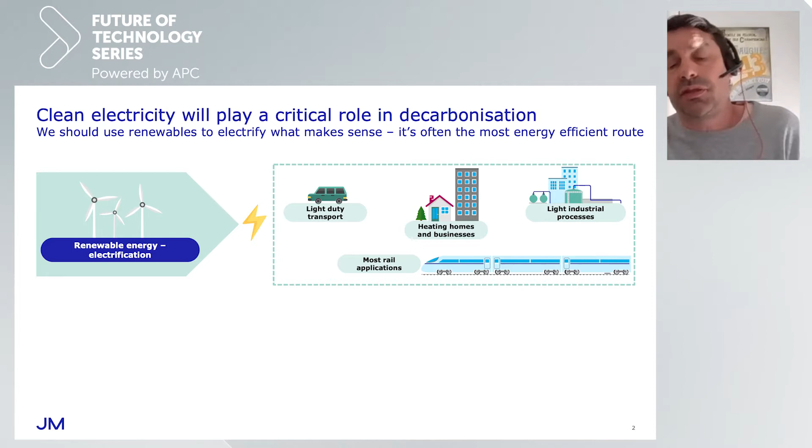We've got to remember we're moving from a global energy system that today has about 80% of energy coming from molecules—whether that's fossil fuels as coal, oil and gas—versus 20% from electricity. So the growth in our electricity system is going to have to be massive. Where we see hydrogen—and we'll come into the different routes of getting to hydrogen—is in energy intensive industrial uses. These are primarily things like cement and steel manufacture, but also a lot of high temperature processes used in industry, which will really struggle in the near to medium term to shift to electrification.

Heavy duty transportation, marine, and some rail applications, particularly branch line type applications, we also see as really critical areas, these hard to abate sectors where hydrogen will play a key role. Also, we certainly see examples coming through globally of where larger and longer range light duty transport will also benefit greatly from a shift to hydrogen.

Aviation's on there. I will have to wait and see whether we'll ever be flying a jumbo powered by hydrogen, but there are many other applications within aviation where hydrogen will certainly be a key enabler to decarbonising that sector. And equally, we're going to start seeing areas where we're going to get crossover between renewables, hydrogen, and then potentially onto things like sustainable aviation fuels.

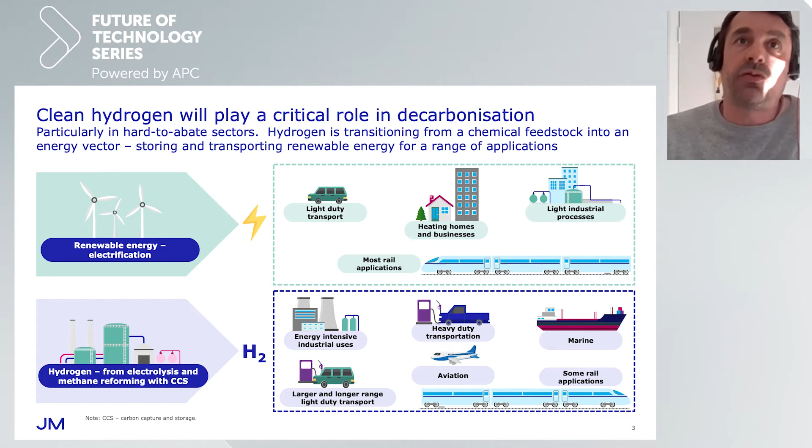That's shown a little bit here in this flow diagram, where there is the potential that we can move to a system where we're using renewables and water to generate hydrogen through electrolyzers. We can pull CO2 either from waste sources, from industry, or from, for example, the use of biomass to create power. We can then upgrade that to hydrocarbons by a variety of different routes. Many of these are technologies that Johnson Matthey is actively engaged in, either by providing components or full technology processes, where we can then get to fuels, chemicals, fertilizers, all to drive a more sustainable and greener future.

Now, this is a technology-driven map at the moment. We know how to do these blocks. What we don't have in place is the market conditions to make many of these things happen.

Particularly when we're looking at things like the ammonia and methanol market. These are global commodity traded chemicals. We will need a global market or a differentiated market to drive low carbon equivalents or low carbon options. And we will have to be looking at how we deal with that global trade.

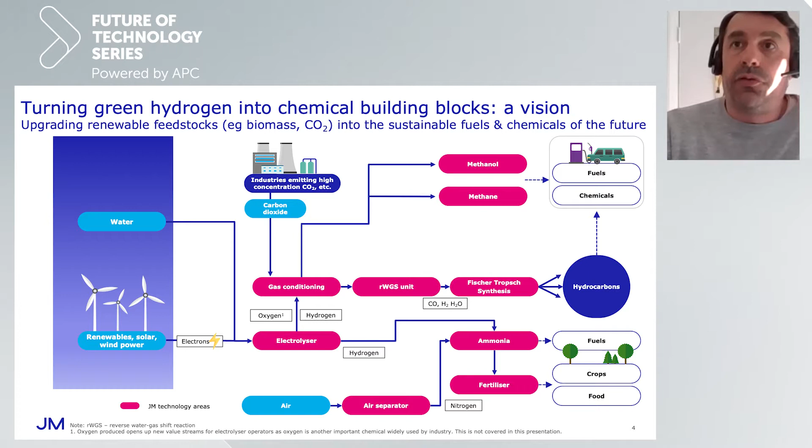Back to hydrogen. You're probably all aware of the rainbow that comes with hydrogen, and I'm only showing 4 of the different colors that are often mentioned. Brown hydrogen coming from coal, very high emissions, but you can see is a very low cost per kilogram of hydrogen, and that's the competition we're in.

Most hydrogen today is produced by steam reforming of natural gas, or grey hydrogen. This is a segment where Johnson Matthey supplies catalysts globally. Again, a high emissions per ton of hydrogen, but again, a very competitively priced product. And this is what we're having to compete with.

When we move to blue hydrogen, where we again use natural gas, but now use carbon capture and storage, we can dramatically cut those emissions. Johnson Matthey developed a technology called LCH, where a key part of that is that we use differentiated technology to drive down the overall emissions by making it as easy as possible to capture the CO2 from the process as cost effectively as possible. And we can achieve over 95% CO2 capture, in some cases up to 98%. This again is a relatively low cost process, but is more expensive than today's grey hydrogen.

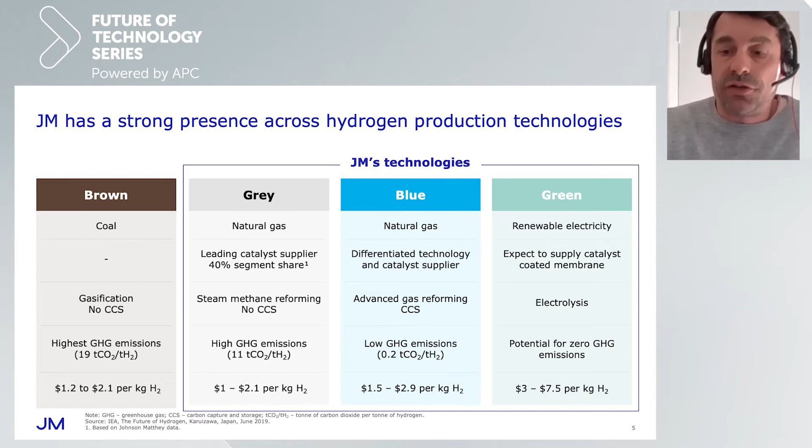What could hydrogen do in the future? These are numbers that we've pulled from some work from the Hydrogen Council and IEA.

Let's focus less on the split between blue and green hydrogen, we can argue about that till the cows come home. The key thing is we're seeing dramatic growth in hydrogen between today and 2050, shown here in terawatt hours. Grey hydrogen today still makes up a substantial amount, and the emissions from that are equivalent to the total emissions from the UK and Indonesia combined. So not insubstantial, and we will see that phase out over the decades as current assets come to end of life, and we'll see the growth of blue and green hydrogen. You can see we're looking at minimum a 10-fold increase in the volumes of hydrogen required.

Grey hydrogen is going to decline due to future carbon prices. We think blue hydrogen will be adopted in areas with good geology to allow carbon storage to happen cost effectively, but also areas with strong infrastructure for natural gas distribution. The UK is one example, but equally the US and Canada, which have large access to low-cost shale gas.

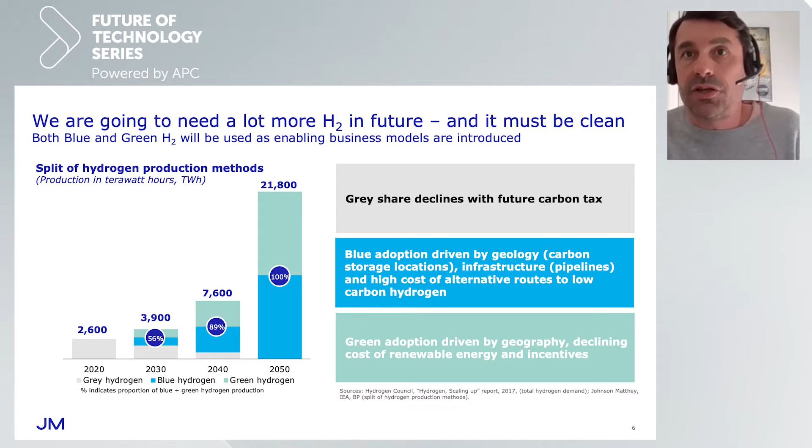On costs - we mentioned this briefly before. What we see is that blue hydrogen will be one of the more cost-effective routes for a number of years, particularly in locations like the UK. But we do anticipate a large cost down in green hydrogen, and in some areas it will become more cost-effective to produce green hydrogen over time than blue hydrogen, with grey hydrogen becoming ever more expensive as carbon prices rise.

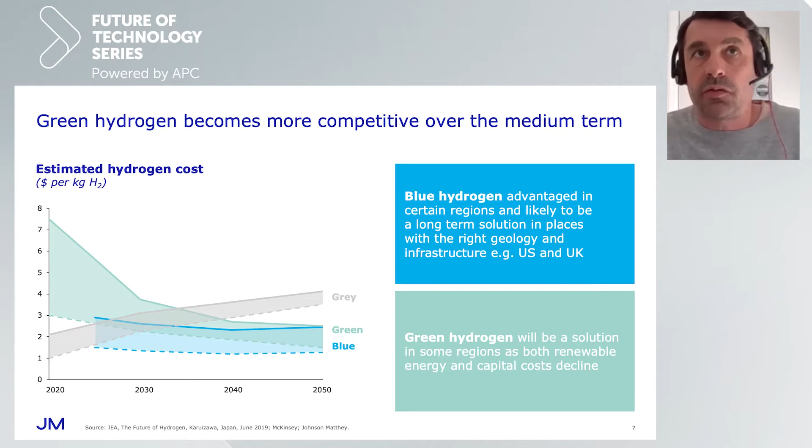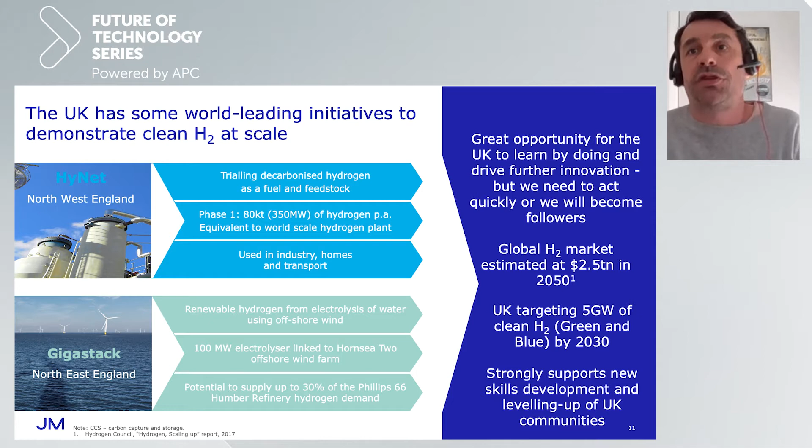So in summary, the UK does have an amazing opportunity to be a world leader. Really, for us to drive a legacy into the UK, particularly into the supply chain - and that's all elements, services, engineering, manufacturing - we need to be one of the first and not a follower. If we're a follower, we'll end up importing key elements of the supply chain. This is one of those timings where we've done a lot of good work, and we've made some really impressive starts, but we've got to follow that through and deploy these projects at scale. The really critical next step - hydrogen strategy is part of it, but it's the business models that are going to allow these projects to go ahead, which will really define the position we can take in the UK.

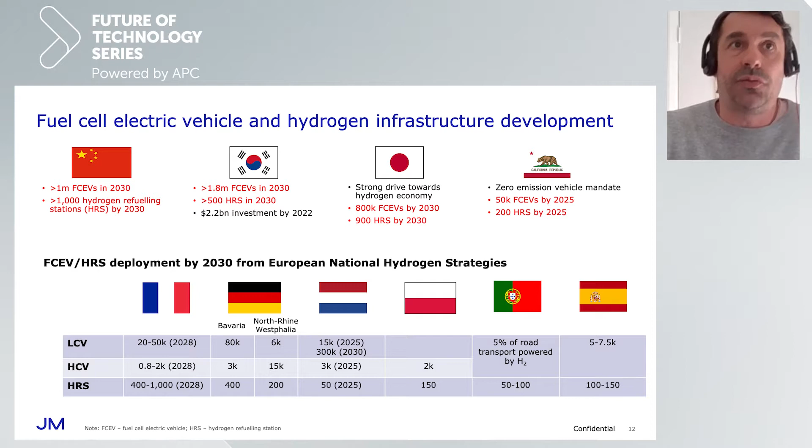Very quickly then, just heading towards wrapping up. There is a lot of interest in fuel cell electric vehicles, and these run across multiple sectors. One element everyone always talks about is the infrastructure, the hydrogen fueling stations. We are seeing more and more plans and strategies coming along from multiple governments looking to install these. We need a similar element within the UK. This will drive both the uptake of light vehicles and heavy vehicles, and once we have the infrastructure in place, we'll be able to see the uptake of fuel cell vehicles in multiple sectors, heavy duty vehicles being one where we see a real need for that deployment.

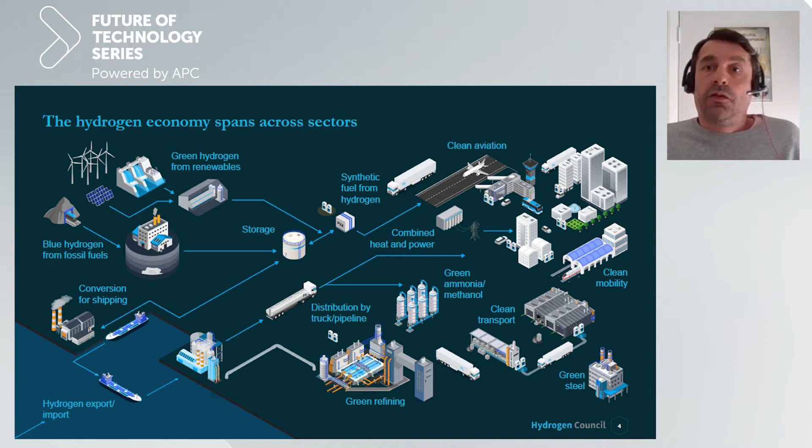So with that, Philippa, I will close and happy to take any questions.

Yeah, great. Thanks, Sam. I've got a quick question myself to start off with. You talked about the focus needing to move to deployment and that needed to be prioritised. Do you think that projects like HyNet that you discussed are good enough to accelerate this market uptake in terms of the deployment factor, or does more need to be done? And should we be prioritising particular areas? There's a few questions in there.

Sorry. So HyNet's one example. There are great projects up at Acorn in Scotland, at St Fergus. The projects announced by Equinor and the Humber, and now BP in Teesside. We'll need all of these, along with multiple large-scale electrolyzer projects. We need to start somewhere though, so getting some of them over the line as quickly as possible is important, with the view to then being ready to deploy at scale through the 2030s.

So it's certainly not just about doing a couple of projects and then sitting on our laurels. It's really about developing a pipeline. Key to that will be getting the business models over the line. Likely that there'll be individual negotiations for the first projects, but then we could well see ourselves in a position similar to offshore wind, where we've got kind of CFD type auctions happening at set periods during the 2030s.

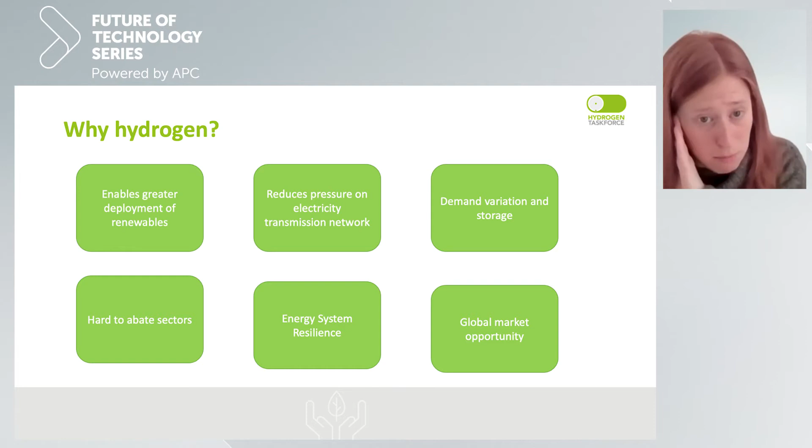So some key questions I think for 2021, the things that we're thinking about now, is what is the role of hydrogen in the UK? What role could hydrogen play? And what do we actually need to do now in order to achieve that?

So some of those questions: how much hydrogen can we realistically produce? If we have this hydrogen, where should it be used? Which parts of our energy system? What are the carbon implications for using hydrogen? What are the energy system implications for using hydrogen?

Where is it that the UK can take a global leadership position? Where should we be a leader and where should we be a follower? What are the existing assets that we have that we can leverage? And what sort of economic benefit would this unlock if we were to do this?

And then the question of what is it that we need to do now in order to unlock that? What are the barriers? Why is this not happening now? What business models do we need to have in place in order to start to scale these technologies? What's the role of government? What's the role of industry?

How do we encourage coordination across the different sectors? Hydrogen is not a single technology, it's a whole ecosystem, with all of these different end-use technologies. If we're starting to look at clusters, how do we get coordination there? How do we ensure that we've got the right skills as we scale up? What infrastructure might we need?

And also, how do we ensure that we're bringing consumers along with us in this? A lot of these technologies are going to touch the end consumer, whether that's hydrogen boilers in your house or sitting in a hydrogen fuel cell bus on the way to work. And we need to make sure that we take consumers along with us.

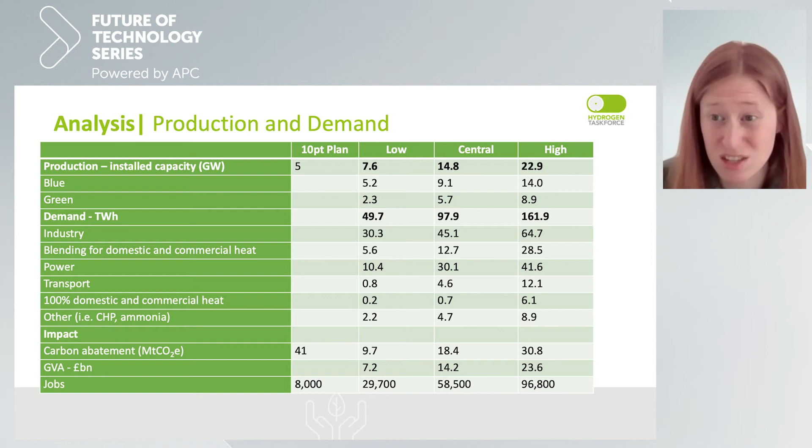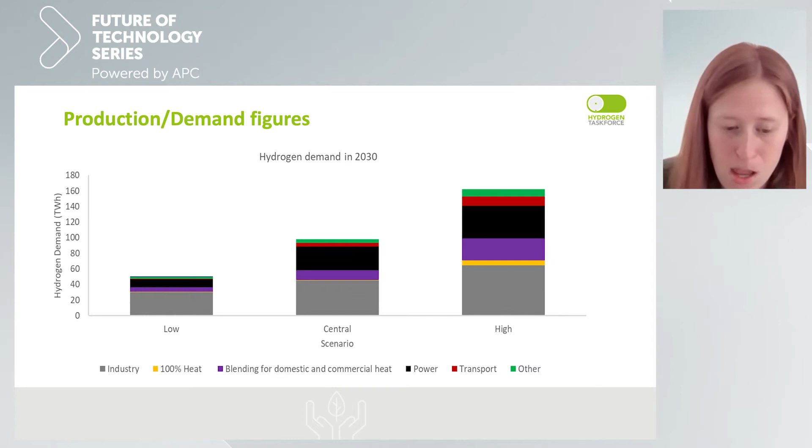The other thing the Hydrogen Task Force did last year is we looked at an economic impact assessment. We think there's significant value to be gained from the UK not being a follower, but being a leader in hydrogen technology with huge export potential. So we looked at the economic value and job creation on a 2035 timeframe across the hydrogen value chain that could be created or protected in the UK by pursuing hydrogen.

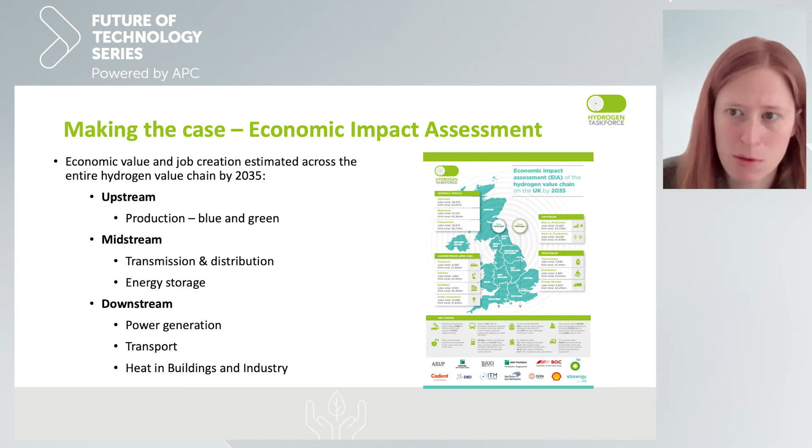We estimate that we could see 18 billion of GVA and 75,000 jobs by 2035. Picking out the transport numbers, we can see about 1.7 billion of GVA and 9,000 jobs in the transport sector. So we think there's huge value to be gained by moving quickly in this area for hydrogen.

In terms of next steps and what needs to happen now - Sam has touched on this - there's a number of things that need to happen over the next 10 years. But looking at what needs to happen now, we are going to see a hydrogen strategy, which we're very excited about seeing in the next couple of months. This comes alongside what's happened globally - we've seen lots of countries coming out with targets and strategies, and the UK will be next. It'll be really important that this hydrogen strategy is ambitious and sets us up.

The second thing is the business models. This is absolutely critical for getting these early stage projects off the ground. I think it's important in this area that the perfect doesn't become the enemy of the good, and getting those early stage projects off the ground will be really key for the next year.

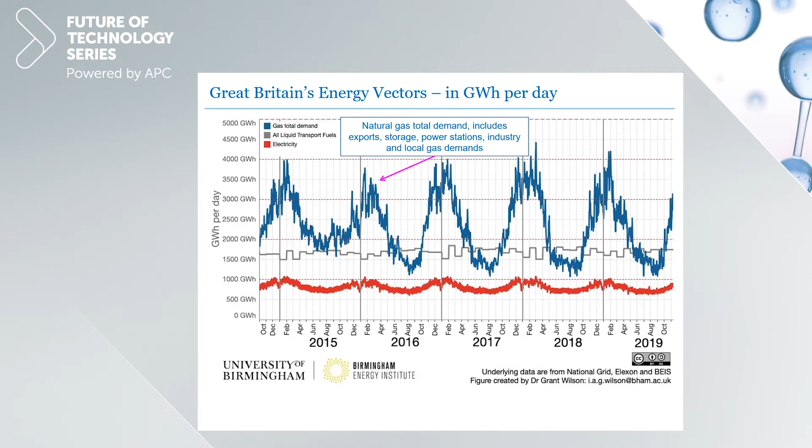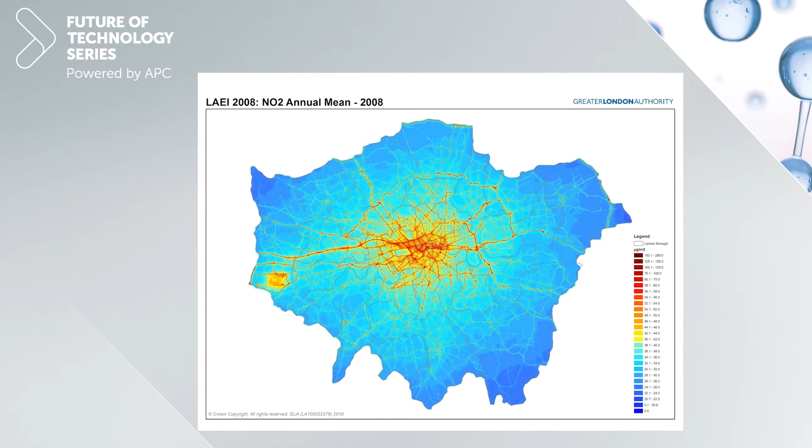There was a question in the chat that implied we might burn hydrogen, and I don't think we will - in any form of combustion engine, not on a road vehicle anyway. That's not to say we might not consider it in gas turbines for power generation, or possibly even for ships, but I don't see it for road transport. I think it's a fuel cell conversion.

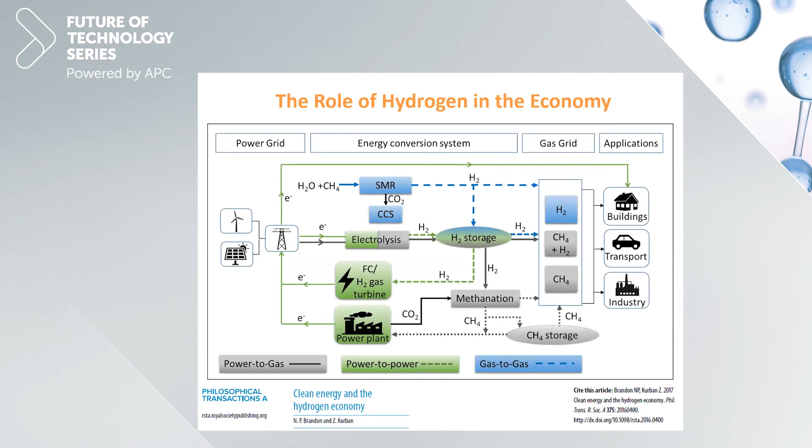And this is my picture, similar to one you've seen before, showing that hydrogen is really an enabler for an energy system, so we don't need to look at that anymore.

In terms of the costs of hydrogen, I can understand why it can be a difficult conversation about green hydrogen and blue hydrogen. I'm an electrochemical engineer, I mainly work on electrochemical technologies. I just want to reinforce Sam's view that we need both blue hydrogen and green hydrogen - we need all the low carbon hydrogen we can get. Today, the most expensive form of hydrogen is green. Green hydrogen is a lot more expensive than blue, and blue is more expensive than unabated hydrogen, which of course you'd expect, because unabated hydrogen doesn't go through the carbon capture step.

But if we look at the prospects for cost reduction in green hydrogen, this comes from a report from IRENA - it's quite useful if you want to look it up, and it's publicly available. I had nothing to do with the report, but it takes a fairly rosy-eyed view of where costs may come down. The key point to take from it is that somewhere between 60 and 80% of the cost of green hydrogen, hydrogen from electrolysis powered by renewables, is the cost of the renewable electricity. So the biggest driver here, in terms of the tipping point of green versus blue, is the cost of the renewable electricity.

All the price assumptions or future cost assumptions around green hydrogen are very sensitive to that, and therefore it will vary depending where you are in the world and the price of renewable electricity. There are certainly some commentators who'd say that once you get down to around $30 a megawatt hour, your green hydrogen should be cheaper than blue. But as Sam pointed out, it's quite a bit more complicated than that, depending on many other factors. But as we continue to see the falling price of renewable electricity and innovations in the electrolyzers themselves, that should help drive down costs. Green still has a journey to go on before it's cost competitive with blue hydrogen.

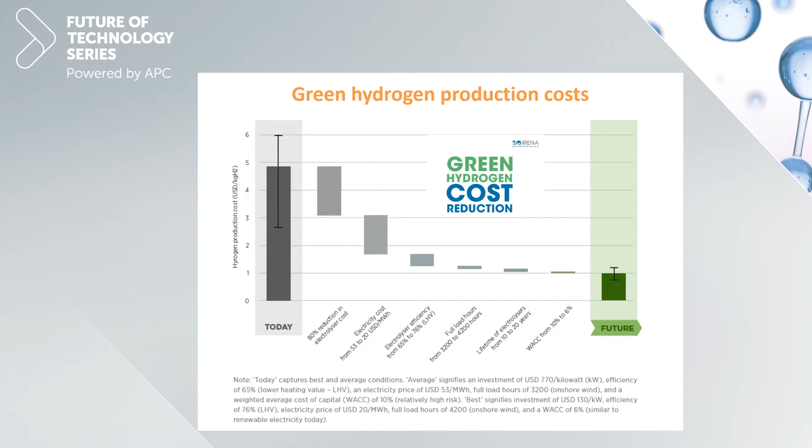So I just wanted to spend the rest of my talk on where things are today in terms of the transport piece. We're followed by Ralph, who will give a more detailed view of the work he and his colleagues are involved in at Jaguar Land Rover, but here's a broader perspective of where hydrogen fuel cell technologies are for transport applications. It's really that integration of hydrogen as the energy carrier on the vehicle and the fuel cell as the highly efficient energy conversion device that takes that fuel and turns it into electricity to produce an electric vehicle. Of course, Toyota have been leading in this space for a long time.

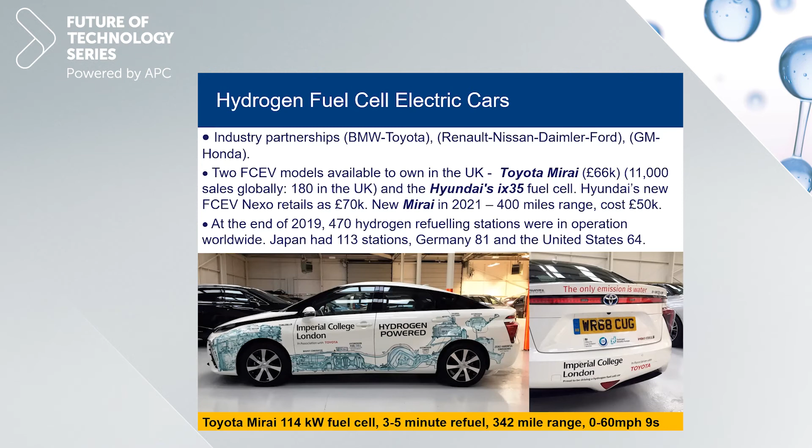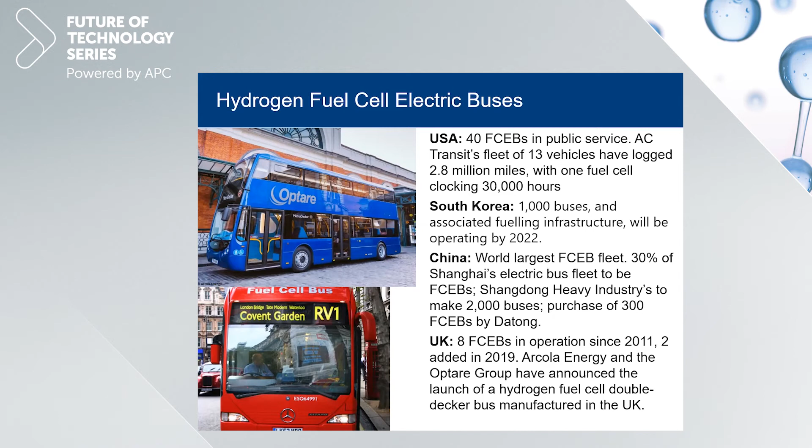As previous speakers have alluded, both Sam and Claire, I think the big opportunity in transport is also in heavier duty vehicles, where the energy requirements are higher and you're competing less obviously head to head with battery electric vehicles. The Optare bus at the top is a collaboration between Arcola Energy, a UK-based fuel cell integrator, and Optare, which is this hydrogen fuel cell double-decker bus manufacturer in the UK. You've got Wrightbus as well, very active in this space in Ireland. And of course, we've had those RV1 fuel cell buses as part of an EU program running in London for a long time. But there are big programs globally around hydrogen fuel cell electric buses.

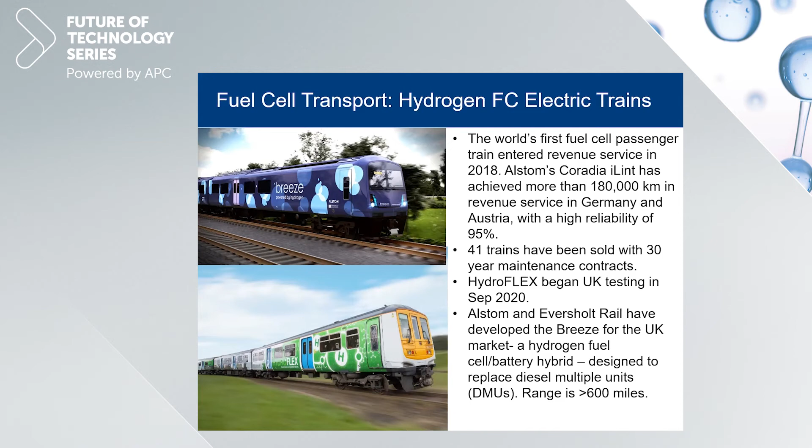I think a rapidly emerging area is around hydrogen fuel cell electric trains. That bottom picture shows the Breeze, which has been developed for the UK market by Alstom, a hydrogen fuel cell electric train designed to replace diesel units on more urban train lines. Sorry, the photograph at the top is the Breeze, and the photograph at the bottom is the Hydroflex, which is on trial in the UK.

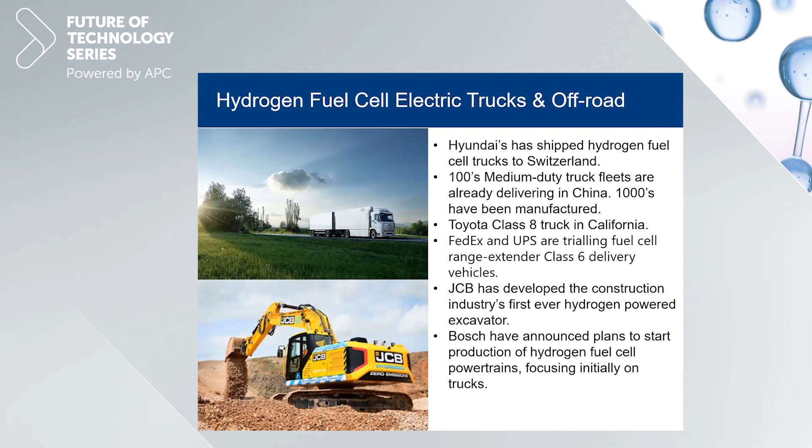And then I should say that all of those fuel cells use a polymer fuel cell, which is a lowish temperature fuel cell, runs about 100 degrees centigrade, uses platinum group metal catalysts. Johnson Matthey are very active in that space as well. But we do have a UK company called Ceres Power, which I'm declaring interest as one of the founders, producing a higher temperature fuel cell. It's a metal-supported solid oxide fuel cell, as it would be known, and that's being put into buses in China.

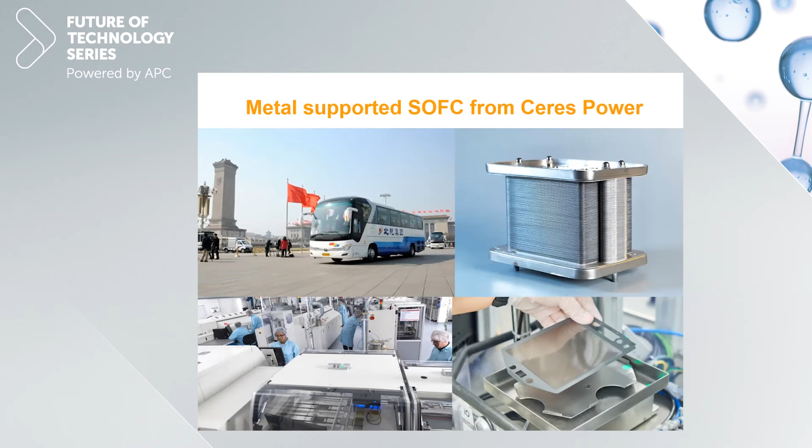These are not hydrogen buses. These are actually buses running on fossil fuels, but this type of fuel cell will run very well on those, but they also run very well on hydrogen. So this is another type of technology that is useful for some types of transport applications, including ships and trains and so on as well. So I'll park it there.

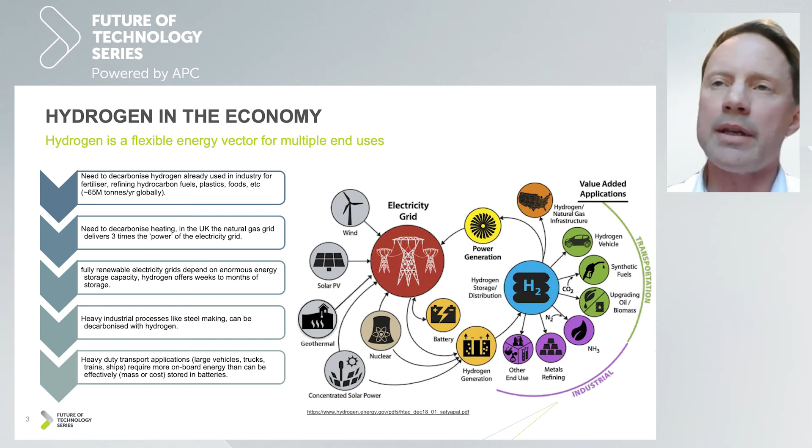Okay, so this is a fairly well understood picture now. All of the other speakers have mentioned the ecosystem behind hydrogen and how the electricity grid and the hydrogen production and storage can work together for a variety of different end uses. I just wanted to bring some numbers to this as well.

So at the moment in the world, we make and use about 65-70 million tons of hydrogen annually, and that's predominantly from non-renewable sources, so coal and gas. One of the first things we really need to think about is decarbonising that.

And to put that in perspective, in automotive terms, 65 million tons of hydrogen is enough to power the 1.4 billion vehicles on the road in the world at the moment. It's enough to power those for 5,000 kilometers each per year if they were run as fuel cell vehicles. So it's a significant amount of hydrogen that is made and used in the world so far.

It's not a new concept to make it, transport it, and use it safely. So that's really the first point I want to make. The decarbonising heating piece, that's been well covered so far.

I just wanted to also bring a couple of numbers to the costs associated with electrifying heating in homes. So it seems like a good idea—take out your gas boilers, put in heat pumps, etc. About 12% of the UK housing stock is social housing.

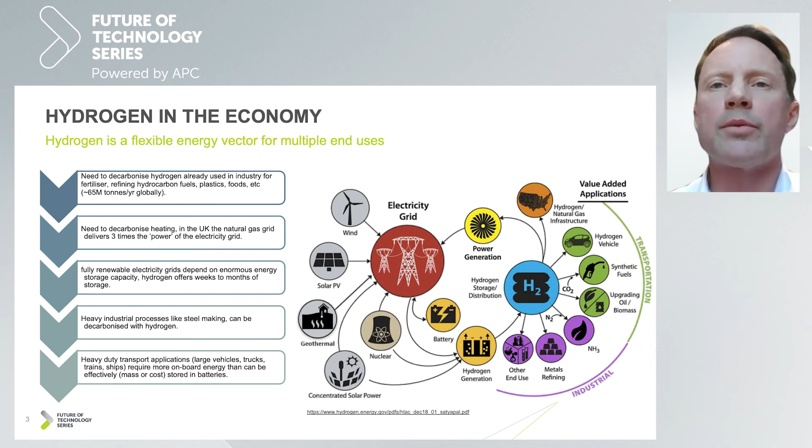And this means heavy vehicles that tow, heavy duty vehicles that need large load capacity, vehicles that need to refill quickly because they are on quick turnaround duty cycles, and also vehicles that operate in low temperature conditions where you need a lot of energy for maintaining cabin comfort. So there are a lot of reasons why you might use hydrogen in the heavier transport application. So if I could have the next slide, please.

And that's true whether you are driving a passenger car or a heavy duty vehicle. It's about the average speed you can actually maintain on those long journeys. Okay, if I could have the next slide, please.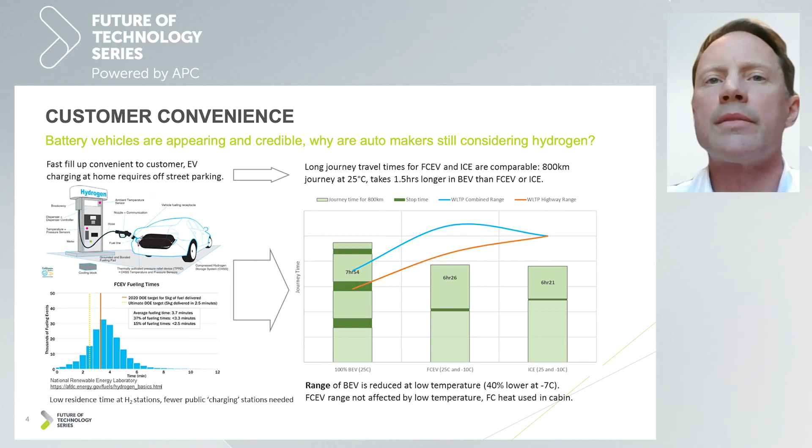But there aren't any hydrogen filling stations around anywhere. That's the criticism - no hydrogen stations around.

Well, yes and no. There are places in the world that are really going headfirst into hydrogen economy, and Japan really has been the leading light there. The commitment to hydrogen stations has ramped up in recent years, and my view is that it will continue to exceed the stated objectives already in the places interested in hydrogen economies. In Europe, Germany is probably the highlight as the leader, with over 90 filling stations at the moment.

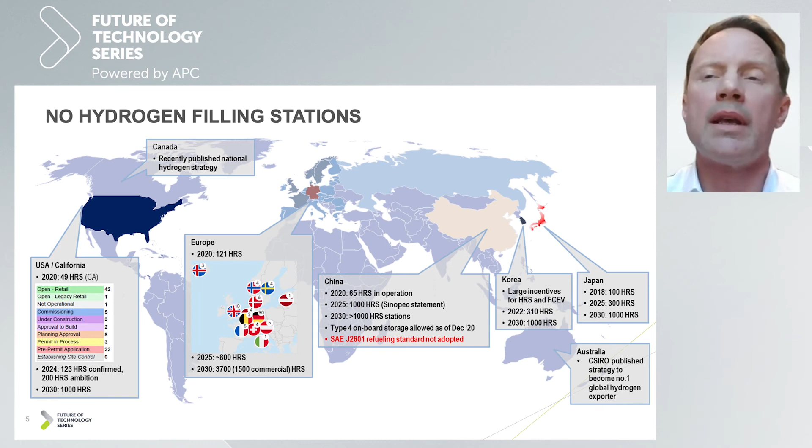The question really comes down to how many filling stations is enough? Where do we need to get to? Within 2 miles of my home in Nottingham, I have 19 petrol stations - that's clearly too many. So the rule of thumb that I work to, and a lot of others work to, is about 1 in 20 fueling stations should be hydrogen capable to provide good coverage nationally. In the UK, there are about 8,000 filling stations, petrol and diesel, so that means if we could get to about 400, we would have a very substantial network.

Okay, if I could have the next slide, please.

Coming back to why automotive is interested in hydrogen - why not just do it all with batteries? The mass of the power pack, and I'll explain that in a second, is significantly lighter for fuel cells and hydrogen when you need a lot of onboard energy.

So if you increase the amount of energy you need, or want, on your vehicle for propulsion, you need to increase the mass of the batteries. With fuel cells, you start with the mass of the fuel cell engine, with zero hydrogen on board or zero tanks, and of course you have no energy on board for propulsion, but you have some mass associated with the engine. Then you increase the energy available for propulsion by adding fuel tanks, so hydrogen tanks really.

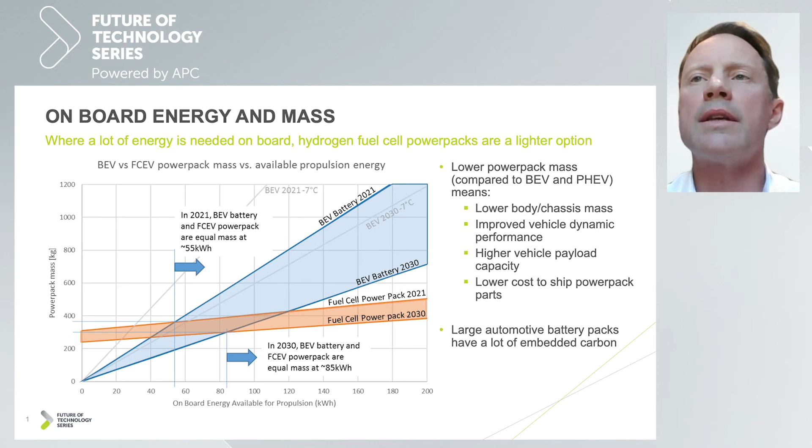Okay, if I could have the next slide, please.

Okay, if we can have the next slide, please.

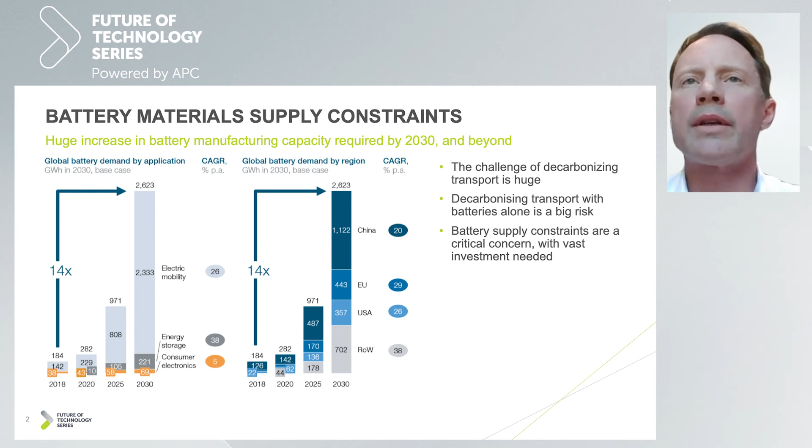Thank you very much. I'd like to invite my other speakers back to the session, and we're going to see if we can take a few of the questions live. I think we're starting first with a question from Paul Turner. Hi Paul, hope you can all hear me. Yes, we can. Okay, thank you.

Why does the panel believe we will not use hydrogen in ICEs, as the efficiency at load is similar to fuel cells, and the ICE can easily be made zero emissions? This is just about design, not science. And I'd like to add, best must not be the enemy of better.